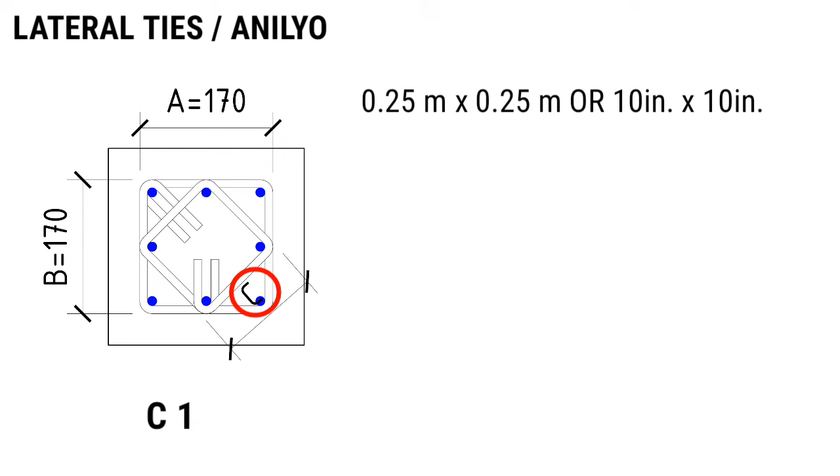At ang formula para makuha yung haba na yan, so C, that is equal to dB or bar diameter ng ating lateral ties plus the square root of A over 2 squared plus B over 2 squared. So, that is equal to 10 plus square root of 170 over 2 squared plus 170 over 2 squared. So, that is equal to 130.2 millimeters or 130 millimeters.

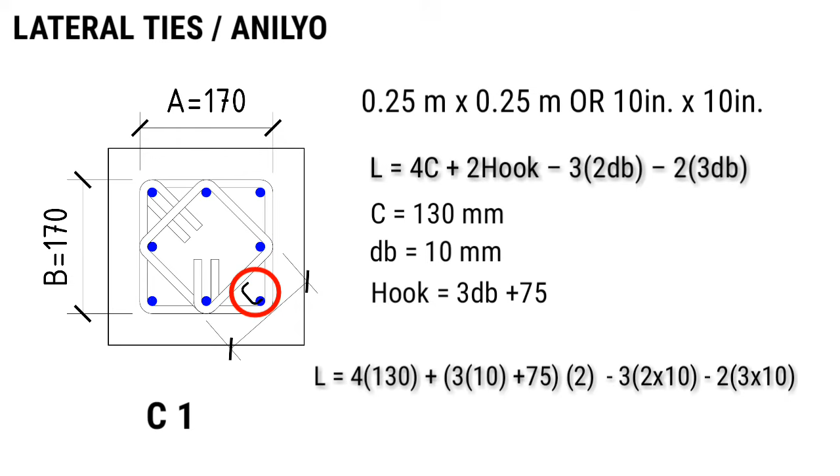So, length, that is equal to 4 multiplied by 130 plus 3dB plus 75 multiplied by 2. Ibawas din natin yung total elongation natin na 3 multiplied by 2 multiplied by 10 minus 2 multiplied by 3 multiplied by 10. And that is equal to 610 millimeters.

So, same process din with C2 or C2A with a dimension of 0.2 meter by 0.3 meter or 8 inches by 12 inches. Where A, that is equal to 300 minus concrete cover na 40 kabilaan, so minus 80, and that is equal to 220 millimeters. For B naman, that is equal to 200 minus 80 and that is equal to 120 millimeters. At yung ating bar diameter, that is equal to 10 millimeters. Yung hook naman natin, that is equal to 3dB plus 75.

So, length ng ating lateral ties for C2 or C2A, that is equal to 2 multiplied by 220 millimeters plus 2 multiplied by 120 plus 3 multiplied by 10 plus 75 multiplied by 2 minus 3 multiplied by 2 multiplied by 10 millimeters minus 2 multiplied by 3 multiplied by 10 millimeters and that is equal to 770 millimeters.

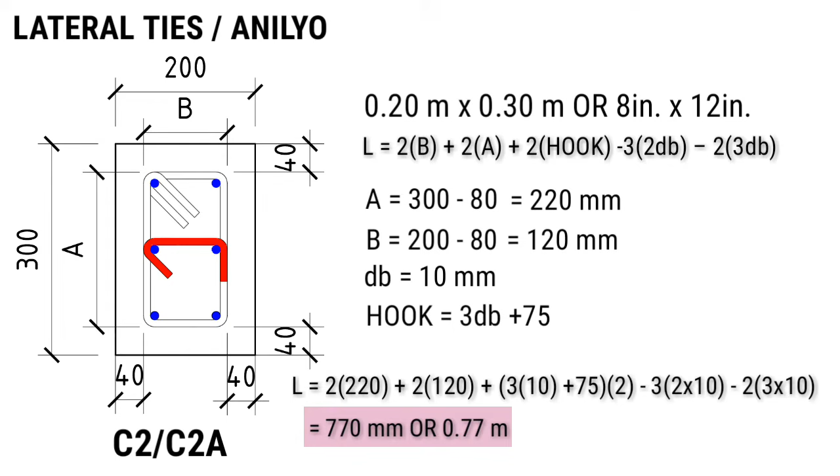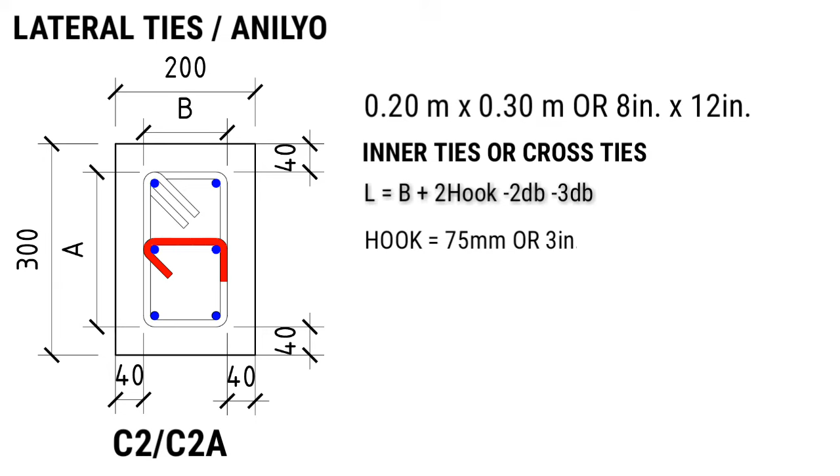So we need 770 millimeters or 0.77 meter na rebar natin para sa outer ties ng ating C2 or C2A. Isunod naman natin yung inner ties or cross ties ng ating C2 or C2A. So length, that is equal to B plus 2 multiplied by hook minus 2 multiplied by bar diameter minus 3 multiplied by bar diameter. Where hook, that is equal to 75. So ginawa kong 75 millimeters dahil masyado nang maliit yung section ng ating column sa side na ito.

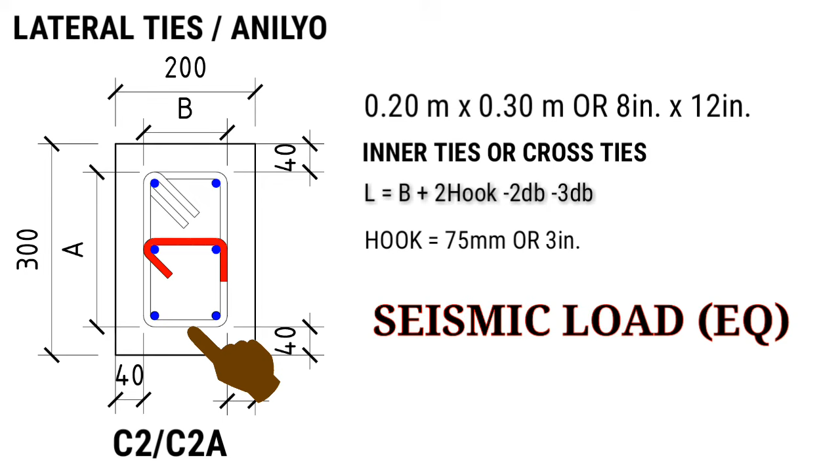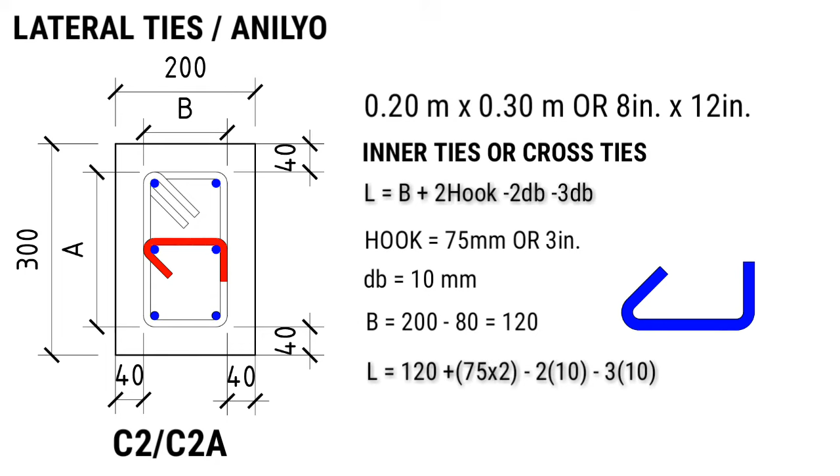So yung bar diameter natin, 10 millimeters pa rin. Yung B or yung side na ito, that is equal to 120 millimeters. So length ng ating cross ties or inner ties, that is equal to 120 plus yung hook multiplied by 2 minus 2 multiplied by 10 minus 3 multiplied by 10 and that is equal to 220 millimeters.

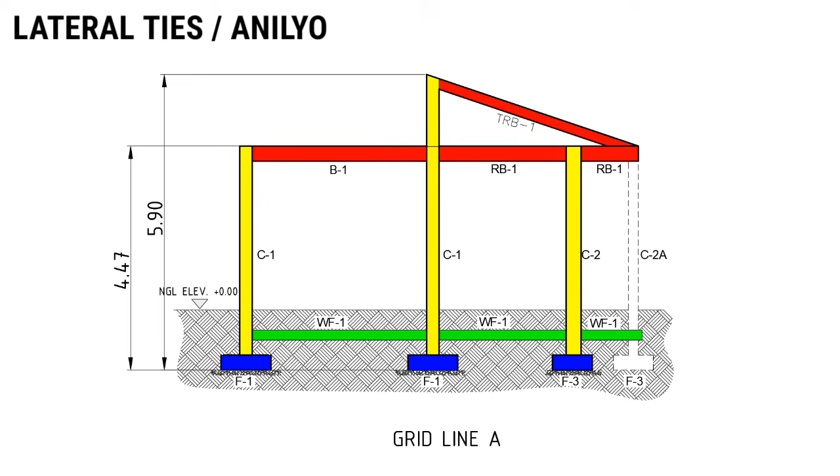Next process natin, alamin natin kung ilang pirasong anilyo or lateral ties ang papasok sa isang poste. So unahin natin yung C1. Let's compute the height na kailangan natin lagyan ng anilyo. So length or height, that is equal to 4.47 meters minus depth ng beam which is 300 millimeters minus concrete cover ng footing na 75 millimeters minus size ng footing rebar na 12 millimeters multiplied by 2 dahil dalawa ito. And that is equal to 4.071 meters.

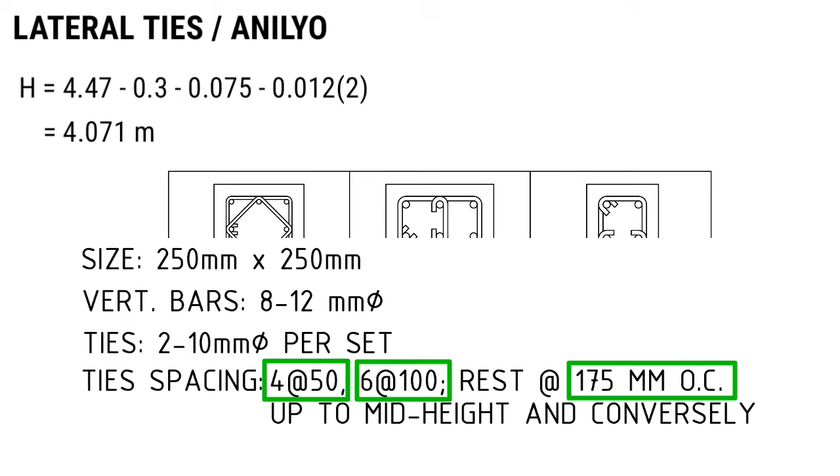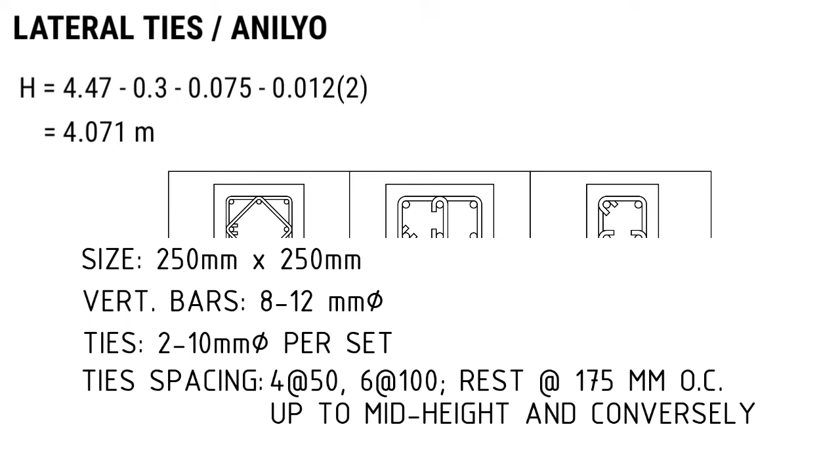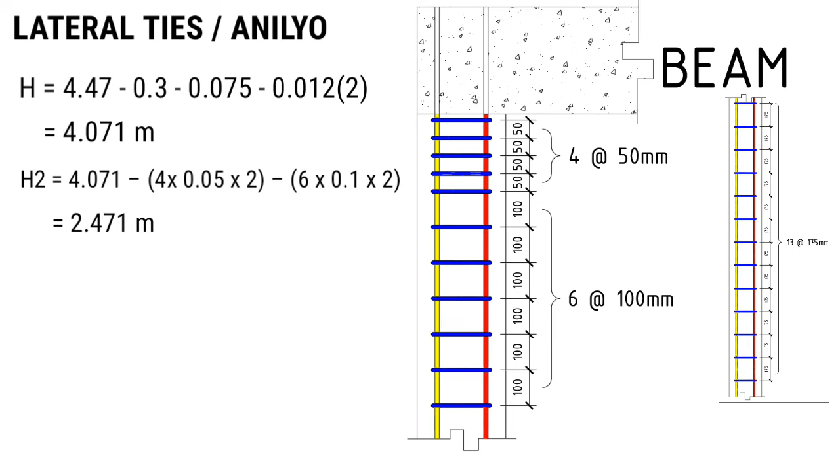So, height, that is equal to 4.071. Ibawas lang natin yung height na nasakop ng 50 mm na spacing at 100 mm na spacing. So, 4 pieces or 4 multiplied by 0.05 na spacing natin multiplied by 2, dahil magkakaroon din tayo ng lateral ties na 4 spaced at 50 mm mula din sa ilalim ng ating beam. Minus 6 multiplied by 0.1 multiplied by 2. And that is equal to 2.47 meters. So, yan pa ang matitirang haba ng column na lalagyan natin ng ties spaced at 175 millimeters.

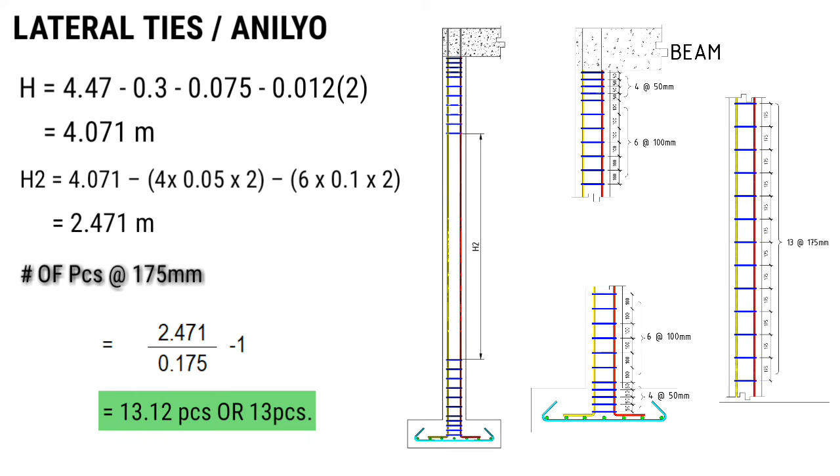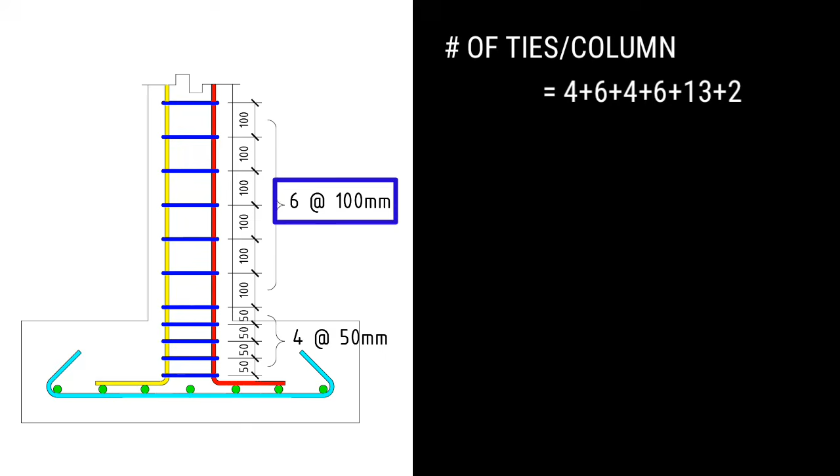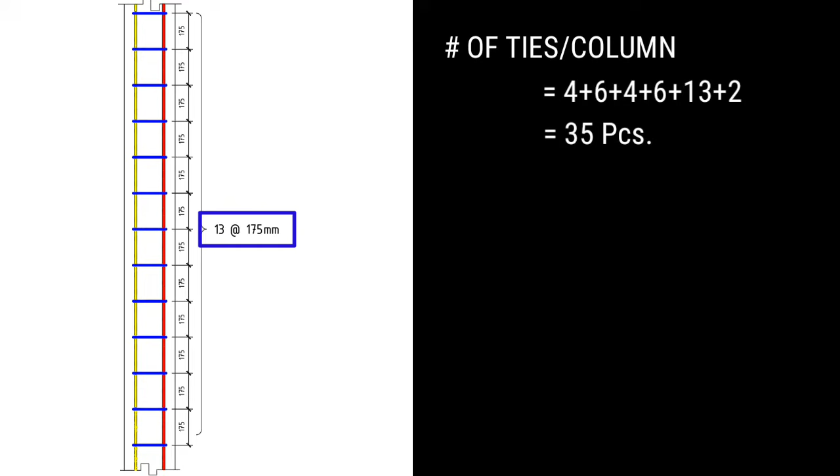So, number of pieces at 175 millimeters, that is equal to 2.471 divided by 0.175 minus 1, and that is equal to 13.12 pieces. Say 13 pieces. The total number of lateral ties per column, that is equal to 4 pieces na spacing na 50 mm plus 6 pieces na may spacing na 100 mm plus 4 pieces mula dun sa ilalim ng ating beam plus 6 pieces plus 13 pieces na spacing na 175 mm plus 2 para sa starter ties natin, and that is equal to 35 pieces. But meron pa tayong joint confinement between beam and column na 3 pieces.

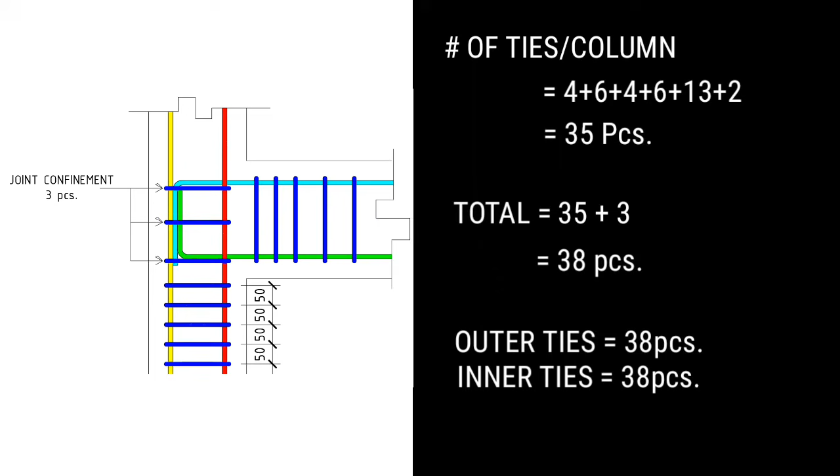So, kaya natin binawas yung depth ng ating beam. So, meron tayong 35 pieces plus 3, and that is equal to 38 pieces na anilyo para sa outer ties at 38 pieces rin para sa inner ties. So, same process din ang gagawin natin sa C2 or C2A. So, we obtain 32 pieces na anilyo para sa outer ties at 32 pieces din para sa inner ties ng ating C2 or C2A.

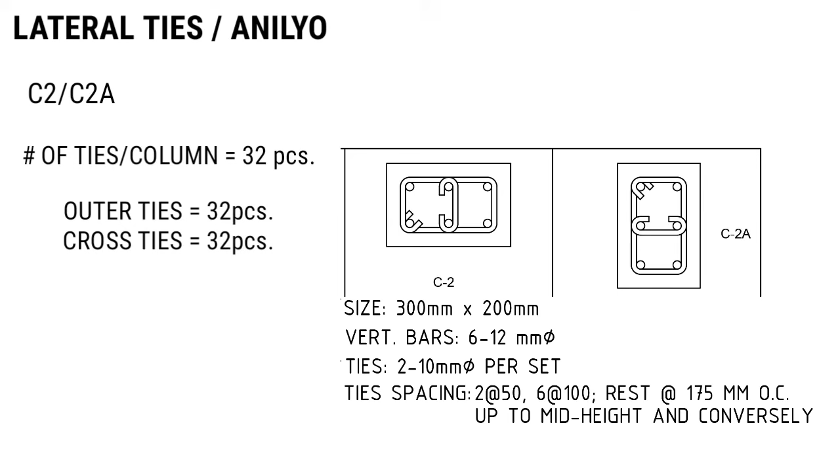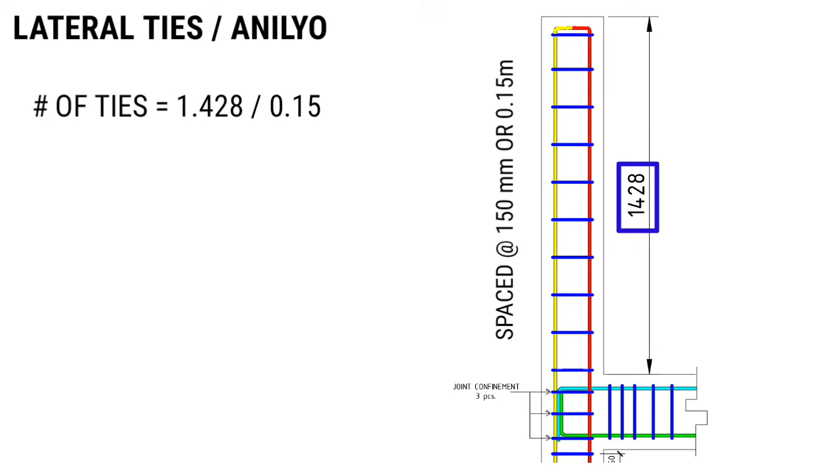And lastly, yung ties naman or lateral ties from top of roof beam to truss roof beam. So, ang height nito ay 1.428 meter at ang spacing ng lateral ties sa part na ito ay 150 mm. So, number of pieces of lateral ties or anilyo, that is equal to 1.428 divided by 0.15 and that is equal to 9.52 pieces. Say 10 pieces.

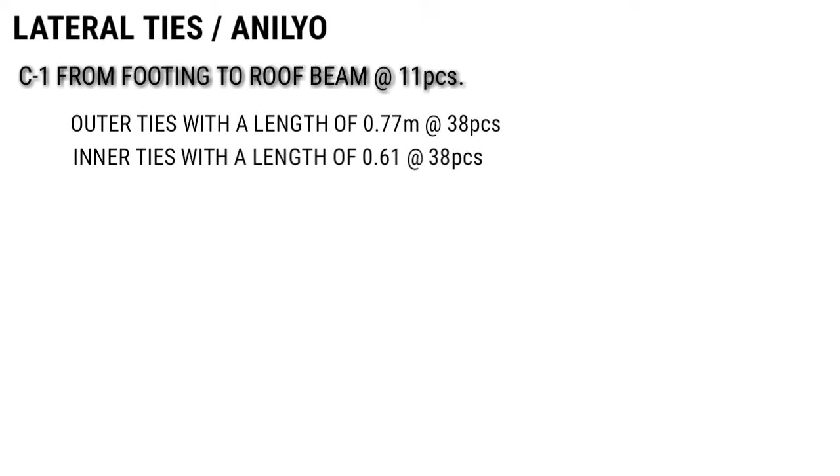So, let's review the result ng ating computation. So, sa C1 from footing to roof beam, meron tayong 11 sets nito. So, outer ties with a length of 0.77 meter at 38 pieces. Yung inner ties naman natin, meron tayong cut length nito na 0.61 meter at 38 pieces. In total, outer ties, meron tayong 38 pieces multiplied by 11 sets and that is equal to 418 pieces at 0.77 meter.

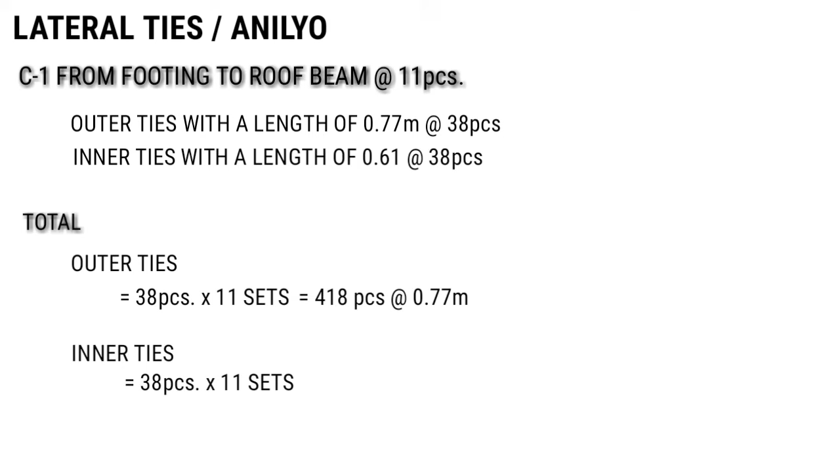Yung inner ties naman natin, 38 pieces multiplied by 11 sets and that is equal to 418 pieces at 0.61 meter. Next, yung column 1 naman natin, measured from roof beam to truss roof beam. So, meron tayong 4 na sets nito.

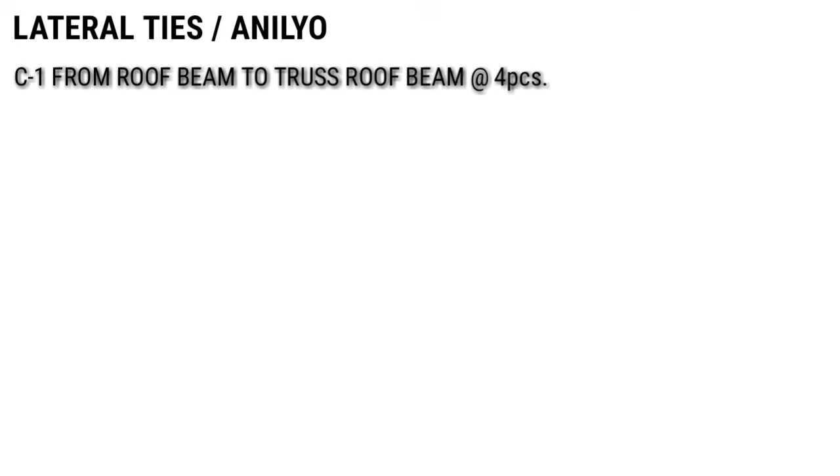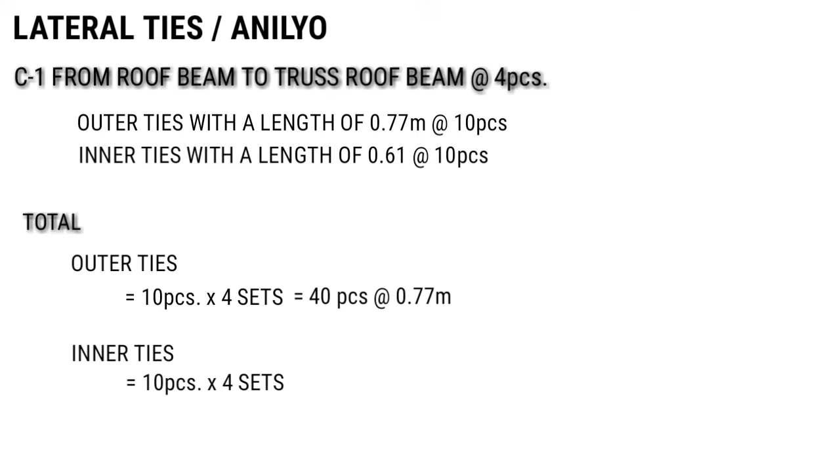So, outer ties, na meron tayong cut length na 0.77 meters at 10 pieces. Inner ties na 0.61 meter at 10 pieces. In total, meron tayong outer ties na 10 pieces multiplied by 4 sets and that is equal to 40 pieces at 0.77 meter. Yung inner ties naman natin, that is equal to 10 pieces multiplied by 4 sets and that is equal to 40 pieces at 0.61 meter.

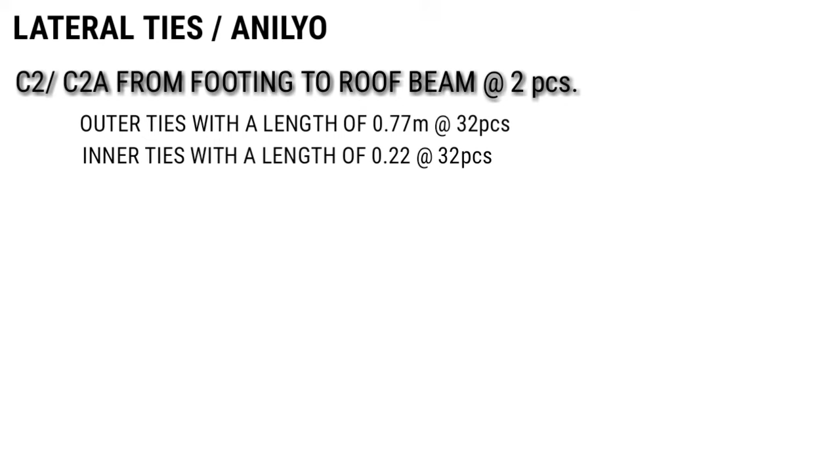And lastly, yung ating column 2 or column 2A from footing to roof beam. So, meron tayong dalawang sets nito. So, outer ties, that is equal to 0.77 meter at 32 pieces. Inner ties na meron itong cut length na 0.22 meter at 32 pieces.

So, in total, meron tayong outer ties that is equal to 32 pieces multiplied by 2 sets and that is equal to 64 pieces at 0.77 meter na cut length nito. Yung inner ties naman natin, 32 pieces multiplied by 2 sets and that is equal to 64 pieces.

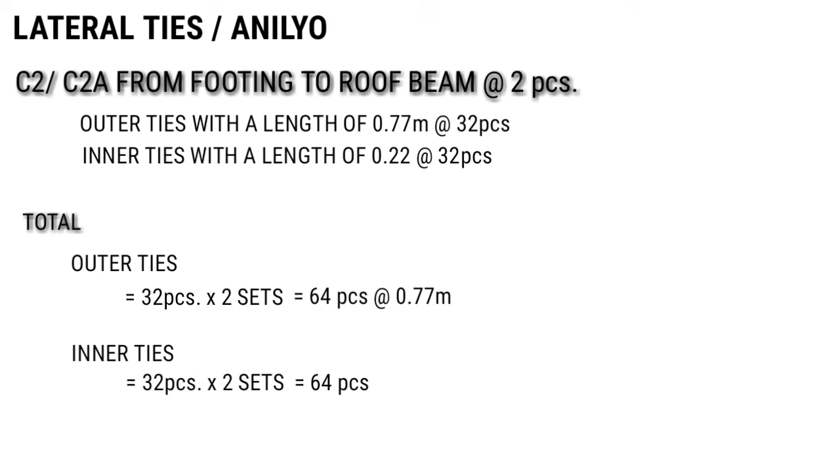So, all in all, we need 522 pieces at 0.77 meter na cut length ng ating lateral ties, 458 pieces at 0.61 meter, and 64 pieces at 0.22 meter.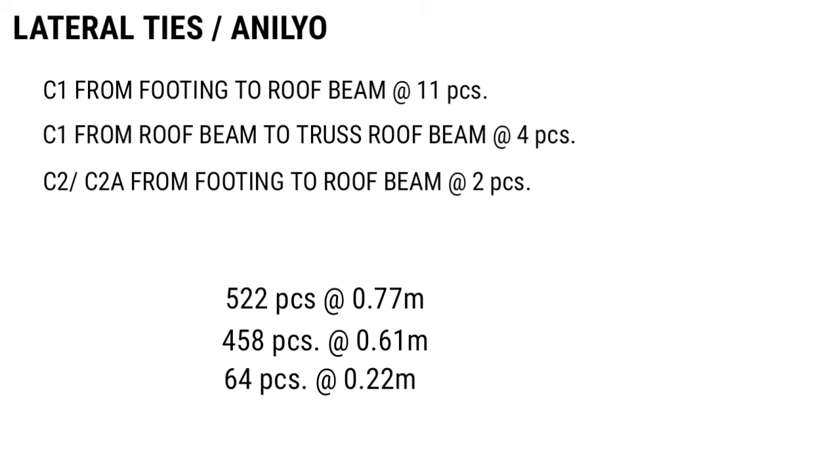So, let's start with 0.77 meter ties at 522 pieces. So, meron lamang tayong dalawang available na bakal na mabibili sa ating mga maliliit na hardware. So, meron tayong 6 at 7.5 meters.

So, ang gawin natin, 6 divided by 0.77 meter na required length natin, that is equal to 7.79 pieces or simply 7 pieces. Next, 7.5 divided by 0.77 and that is equal to 9.74 pieces or simply 9 pieces. So sa dalawa, ang may kaunting wastage ay ang 7.5 meters. Therefore, gagamit tayo ng 7.5 meters at 10 mm diameter na bakal para sa 0.77 meter na cut length natin.

Ang tanong, ilang 10 mm by 7.5 meter ang kailangan natin para mabuo natin yung 522 pieces na requirement natin? So, number of rebar at 10 mm by 7.5 meters, that is equal to 522 pieces divided by 9 na makukuha natin sa 7.5 meters. And that is equal to 58 pieces of 10 mm by 7.5 meters.

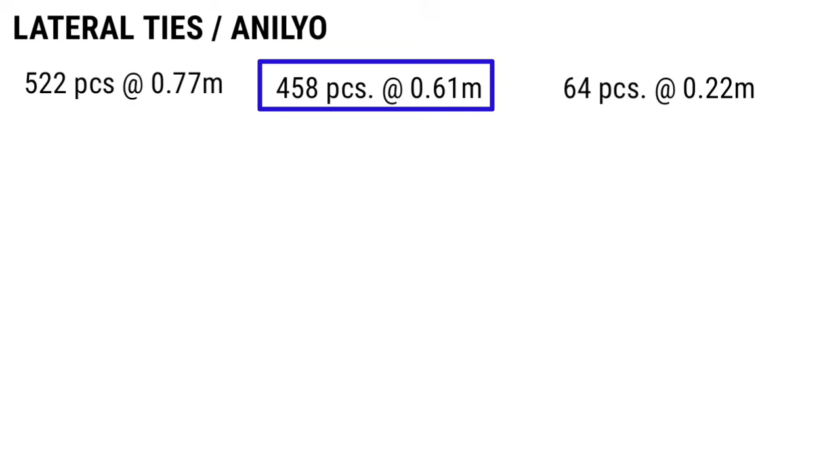Isunod naman natin yung 0.61 meter na ating anilyo at 458 pieces. So here, kung makikita nyo sa dalawa, ang best choice natin ay ang 7.5 meters. So number of rebar at 10 mm by 7.5 meters, that is equal to 458 pieces divided by 12 na makukuha natin sa 7.5 meters. And that is equal to 38.17 pieces or simply 39 pieces. So we need 39 pieces of 10 mm in diameter by 7.5 meter.

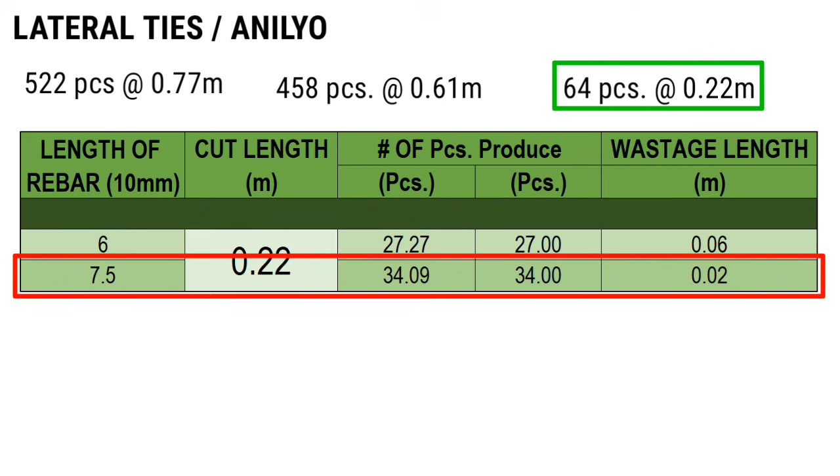Isunod naman natin yung 0.22 meter na cut length natin at 64 pieces na lateral ties. Base sa result, 7.5 meters ang gagamitin natin haba ng bakal para putulin ito into 0.22 meter, dahil mas maiksi ang wastage nito na 0.02 meter compared sa 6 meter na may wastage na 0.06 meter.

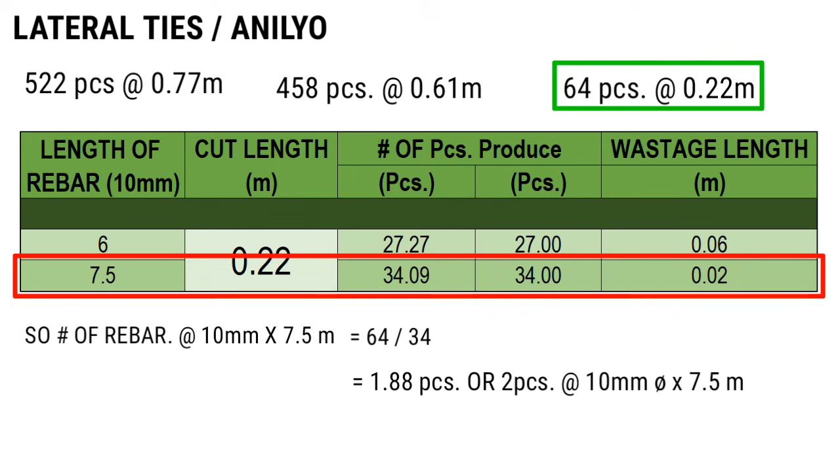So, number of rebar at 10 mm by 7.5 meters and that is equal to 64 pieces na required natin divided by 34 pieces na makukuha natin sa 7.5 meters and that is equal to 1.88 pieces or simply 2 pieces of 10 mm by 7.5 meters.

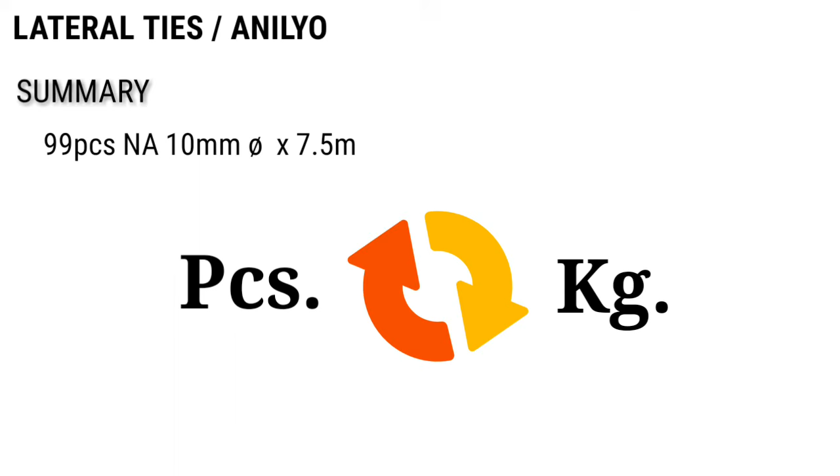So, gawan naman natin ito ng summary. For lateral ties naman or anilyo, we need 99 pieces na 10 mm by 7.5 meters. So, kung gagawin natin ito ng BOQ or BOM or yung tinatawag nating contract, dapat in terms of kilogram tayo. So, let's convert the number of rebar into kilograms. So, we need this table para ma-convert natin ito into kilogram.

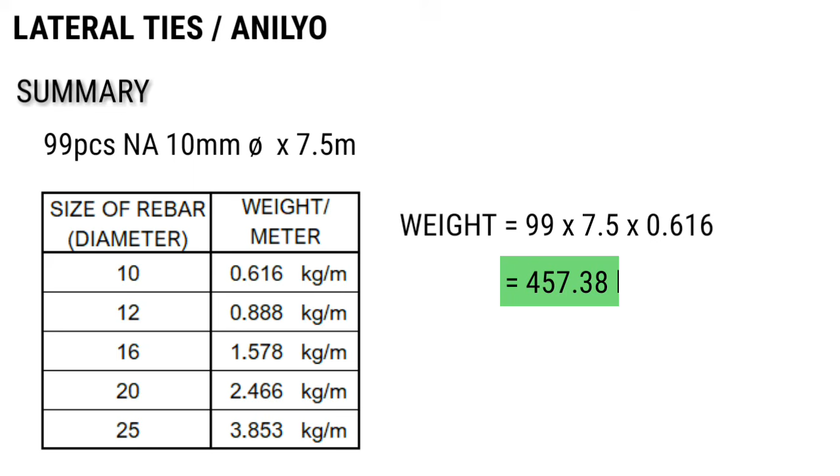So, we need 99 pieces na 10 mm by 7.5 meters. Weight, that is equal to 99 pieces multiplied by 7.5 meters multiplied by 0.616. And that is equal to 457.38 kilograms. So, ito naman yung ating cutting list para sa ating lateral ties or anilyo.